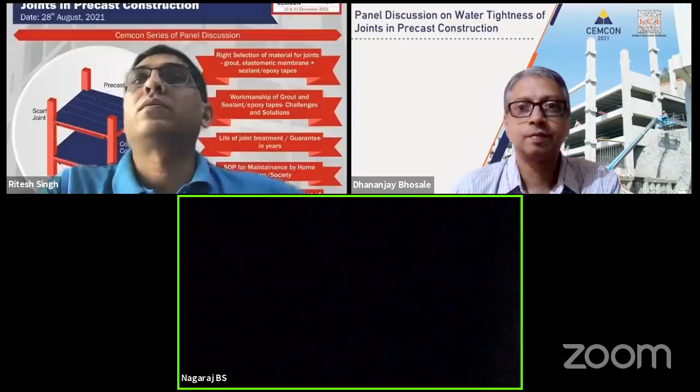Dhananjay, is my background okay? I think you have applied some other background. This was the background shared by Teresa. Is your WhatsApp number on? Yeah, I can just forward the right background. The background should look like the one which I have. Sure, one minute, I'll just forward that.

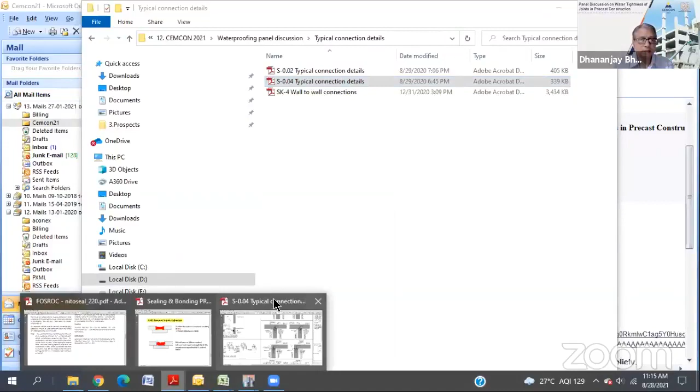Is the screen visible now? Yes, Dhananjay, the screen is visible. What happens is, if this is a wall-to-wall vertical joint, like a box type of joint in which there is one external side and one internal side, and we want to apply sealant on the external face of this joint. So what I've taken is an explanation from Sika material. Are you able to see this, preventing three-side adhesion and trying to have adhesion on two sides? Yes, Dhananjay, I'm able to see the screen.

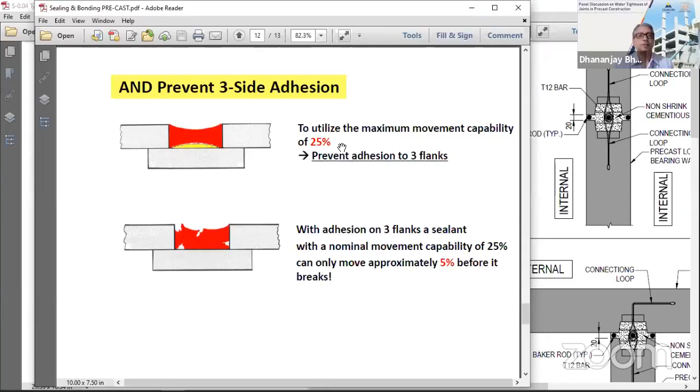So basically what is more important is to have a sort of bond breaker between the back of the joint, and to have a sealant connection on the two adjacent edges of the wall, because this 25% and 5% expandability of the sealant happens that way, no? So can you throw more light on this?

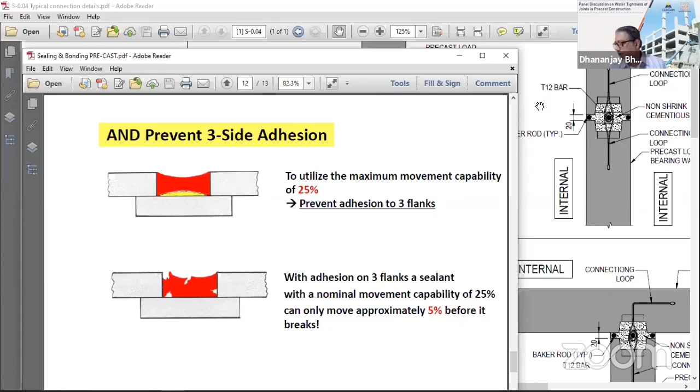Yes, Dhananjay, I would like to say we just have to come out of that thinking that we have to fill this cavity. First of all, this topic is very close to my heart because there's a general perception in the industry that precast structures leak, and the onus is on us to remove this perception.

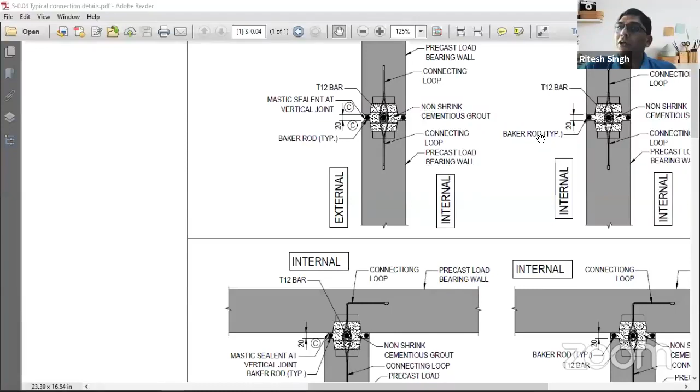As rightly said by Anand, actually the sealant should be thought of at the design stage itself. We need to see what type of joint we need to have, whether to have a flush joint or a recess joint. In case you're having a flush joint, it will not be so durable, it will be exposed to UV light and deteriorate quite fast. Better to have recess joints. That is the first aspect.

Then the geometry of the joint sealant, that even gets ignored. We all know 2:1 is the standard ratio. Why 2:1? Because at the sides we don't get the proper depth, and the sealant is just applied like a coating. So as you showed in the picture, that is mandatory - we need to have adequate depth and width. That will actually play an important role in reducing stresses in the sealant and enhancing its durability. If we have third-side adhesion, then there would be chances of cohesive failure, the stresses would be on all three sides, and you're reducing the life of the sealant.

So, adding to Mr. Ritesh Singh, the selection of the right sealant is also one of the important criteria. And over and above, whether the sealant application is above ground or below ground is also one of the criteria. Suppose if the sealant application is below ground, even though we may treat the joint properly with a sealant, and even with good quality precast construction, there could still be chances of water ingressing through the precast panels. So we need to ensure that the sealant is covered with an elastomeric tape, and the entire precast element which is below ground level has to be made watertight by proper selection of the waterproofing system. That is also one of the important criteria.

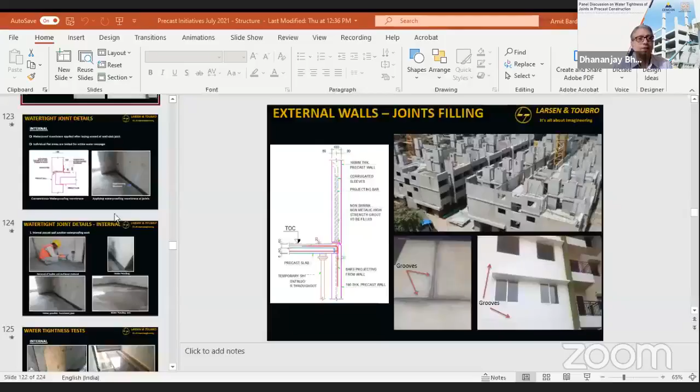I joined again and the host privilege was taken out, so I cannot project my screen. Can you see if Mr. Amit is able to share his screen? If he isn't given co-host status, how can we make him co-host? He can share, I think we can continue. I just wanted to show some details of what we've been doing, I can come back also. Amit sir, you can share now. Hold on a minute, in between my connection got disconnected, so I had to log back in. Just quickly, four or five minutes, I won't take much time, but since the crowd is there, you should elaborate more so people will be interested in understanding the points you're making.

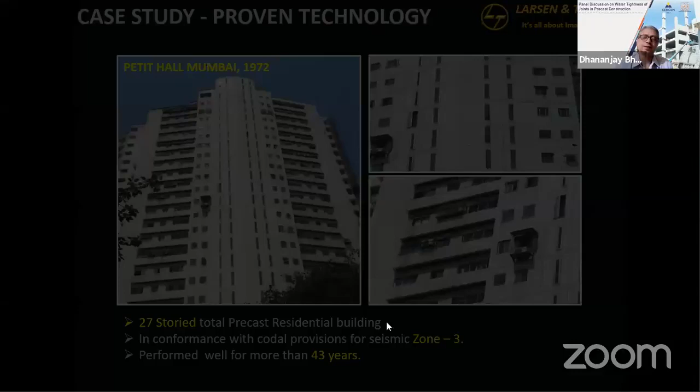So we were talking about... I think you can see my screen now. Yes, yes, Amit, right.

This building, it's not our building, not L&T's building — a 27-story tall building. Not many people know about it; we did not know until 2016. Honestly, until then we used to say we have built the tallest precast building in India, but ours is only 23-story. This building has been standing since 1972, a total precast building, built by Shirish Patel and Associates.

43 years right next to the sea, Nepean Sea Road. Each flat is about more than 15-16 crore now. It's been in existence, people are using it, they have been maintaining it. They have issues, joint here, facade there, right at the sea coast, lot of rain. They have treated it, but the building is in use.

So if somebody has issues, it's right in zone 3 Mumbai, it has seen its fair amount of shaking also, if not a full earthquake. So that life durability, if you look at it, there's a paper also by Shirish Patel, if somebody is interested, look it up. It's amazing, in 1972 how they built this building, what kind of tests, full scale tests they did, the whole setup, the cranes they hired and bought. It's a very interesting idea.

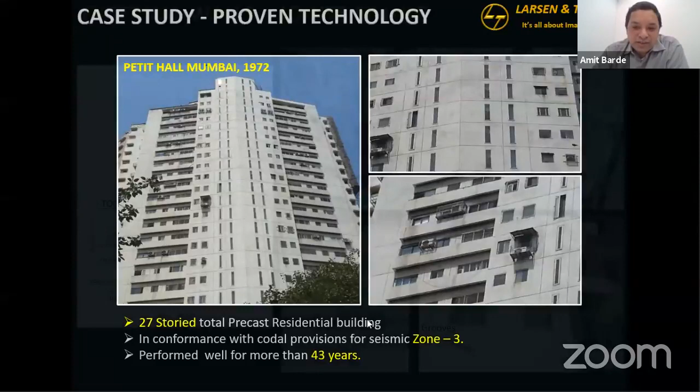So these are the windows and all which were detailed to be inset. But this one elevation, if you see, it's fully exposed, there is no inset or anything, so you can't escape the rain. So what we said was, okay, we're just going to physically protect it. So we built this band. If you look at it, it was like a physical barrier, so water has to really climb up to get inside, right?

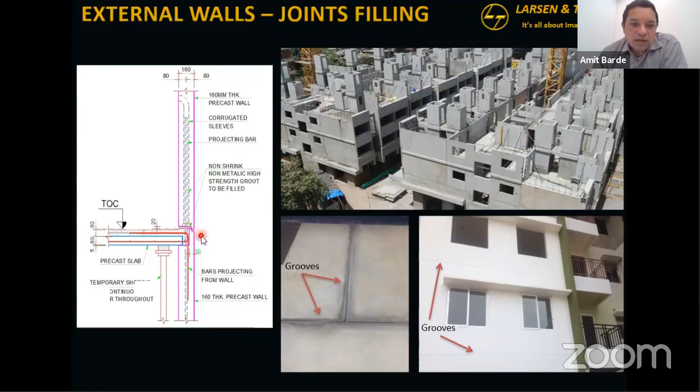Some architects like it, some don't. The bands actually went well. Now when you see the finished building, it just looks like a painted band, but some architects don't like it. Then we transitioned into this step-up joint inside. Again, the whole idea is water shall not climb up to get inside the building.

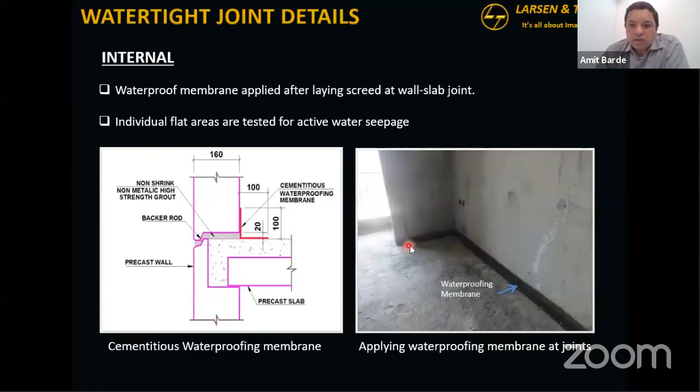Then this is the joint treatment I was calling out, where once you do - let's say your sealant, your backer rod, your grout - then you do additional waterproofing treatment, whether it's an interior wall or exterior wall. And then we are actually flooding these rooms, not everywhere, but we are at somewhere around 5 to 10% now. We address it on a case by case basis for the issues that we have.

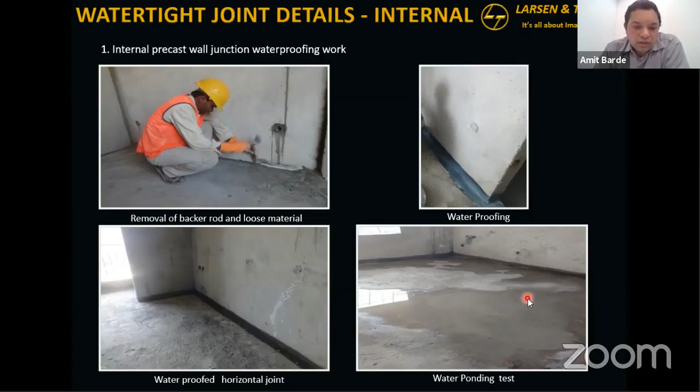But this is the data I have - what I was mentioning - that when I used to see 10% of the issues, in recent years I'm just seeing about 1 to 2% of the issues. This is the external joint. So we actually adopted this, in that 2014-15 period, from the Singapore code. We are actually simulating this rain and then using those guidelines with a certain pressure over an amount of time, and then evaluating these joints. Like I said, now this same requirement is built into IS 15916.

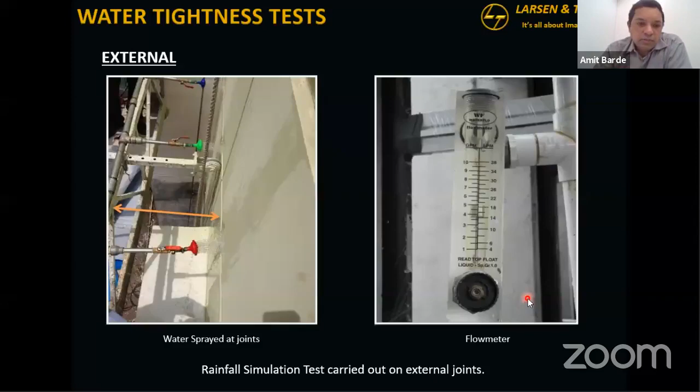So, yeah. So basically, even I was not aware about this 27-story Petit Hall building.

That's right. And are they not facing any issues of replacing the sealants or replacing the joint treatment that was done 43 years back? Yeah, they are. Like I said, there are issues. They have even covered up some of the joints, some of the elevations and all. But the point I wanted to drive is, it's not like the building has been abandoned.

Most people, I think, when we start discussing, the whole mindset is, oh, a precast building means it's going to leak, and 10 years down the line you're going to abandon the building. This building is in full use. They're doing their fair share of maintenance, like all other buildings. 43 years, building is occupied, flats are selling, very prime real estate area. It works - you just have to provide attention to details.

So, another point - what many people keep asking is, what should be the SOP to the society or to the end user when we hand over any precast building to them with related to the joint treatment. So, do we need to specify something for them? Do we need to have some guidelines prepared for them, that they should have this type of treatment done on the building maybe after 20 years, after 10 years, or after 50 years, something like that?